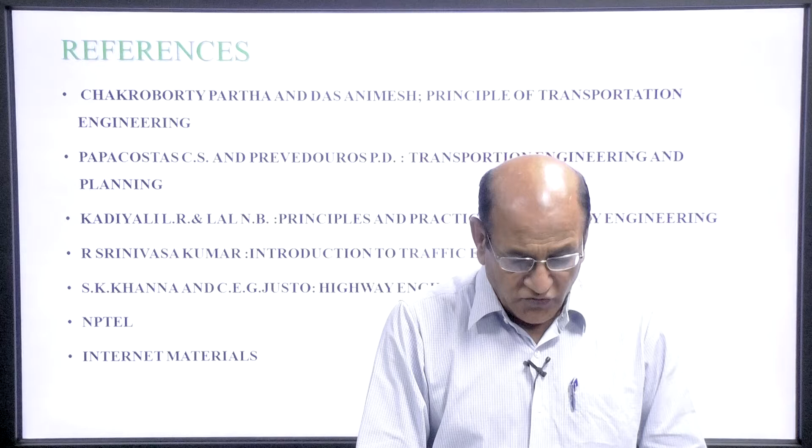References I have taken: Chakroborty Partha and Das Animesh, Principles of Transportation Engineering. Second, Papacostas, C.S. and Prevedouros, P.D., Transportation Engineering and Planning. Kadiyali, L.R. and Lal, N.B., Principles and Practices of Highway Engineering. R. Srinivasa Kumar, Introduction to Traffic Engineering. Some material has been taken from NPTEL and some material has been taken from the internet.

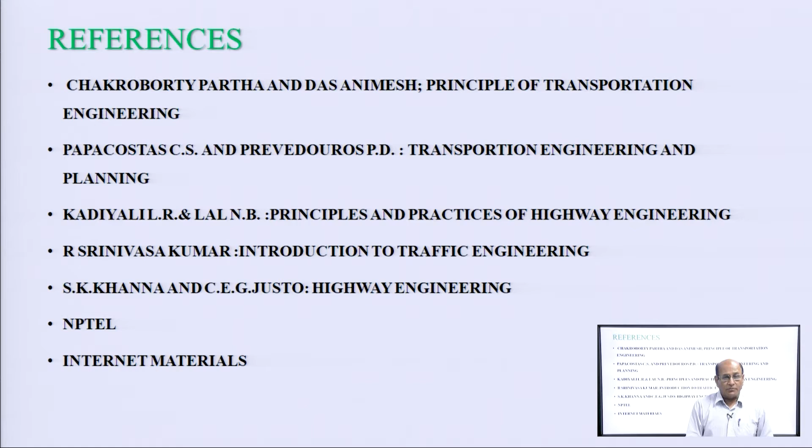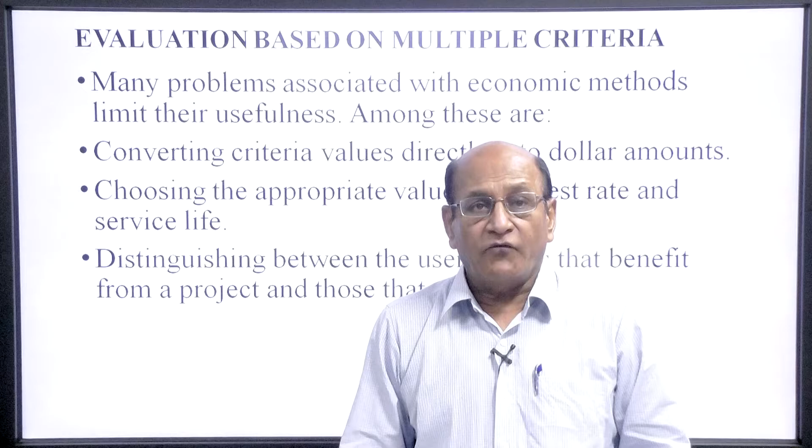First is evaluation based on multiple criteria. Many problems associated with economic methods limit their usefulness. Among these are converting criteria values directly into dollar amounts or rupee amounts. Second, choosing the appropriate value of interest rate and service life. The next is distinguishing between the user groups that benefit from a project and those that may lose.

Evaluation is the process by which we can determine which project or which alternatives are better than others. Finally, we can choose one of them, but there are many criteria for selection of the alternatives. Suppose we are talking about Lucknow; nowadays Kisan Path is under construction. There are many alternatives of Kisan Path. That includes construction cost, land cost, compensation of lands, comfort to the passengers or users, and of course, environmental impact. Presently, Kisan Path is on the outer periphery of Lucknow. It is covering some part of other districts also.

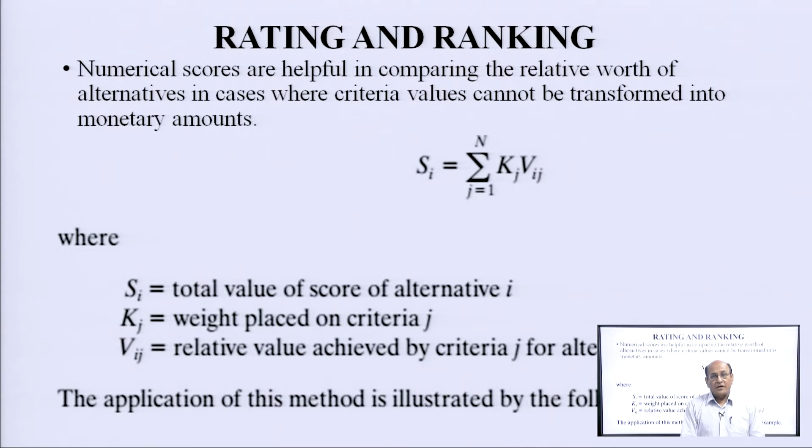This discusses evaluation methods that seek to include measurable criteria that are not translated just into monetary terms. The main thing in evaluation is rating and ranking of the alternatives or projects, because this is one of the tools by which we can say this project or this alternative is better than that one. So, numerical scores are helpful in comparing the relative worth of alternatives in cases where the criteria values cannot be transformed into monetary amounts.

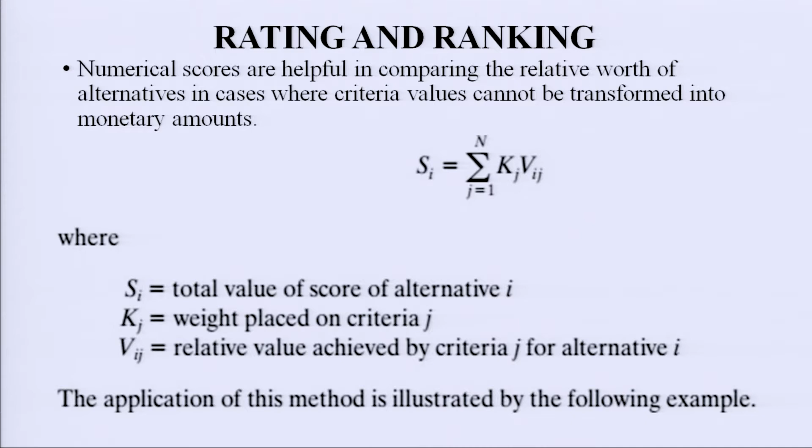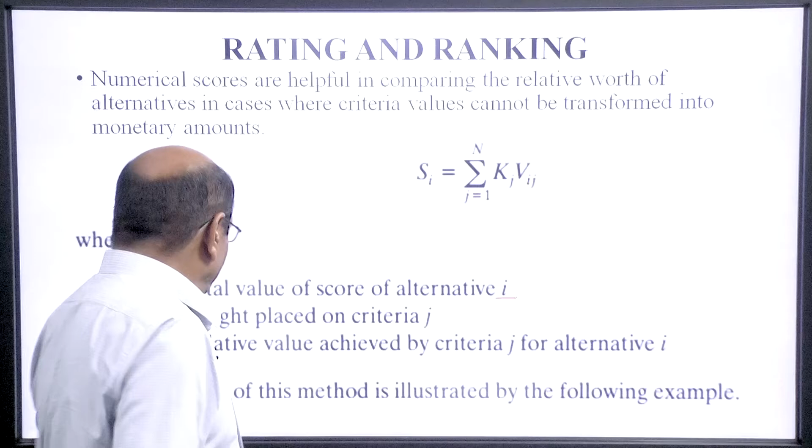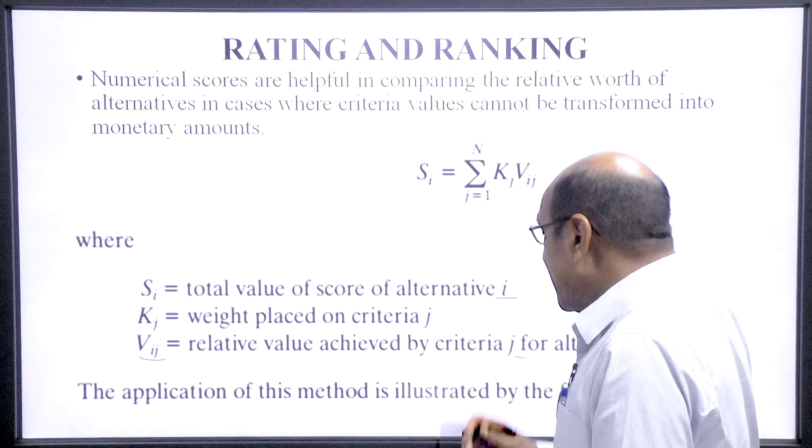So, this can be written as S_i = sum over j = 1 to n of k_j V_ij, in which S_i is the total value or score of alternative i, k_j is the weight placed on criterion j, and V_ij is the relative value achieved by criterion j for alternative i. The application of this method is illustrated by the following example.

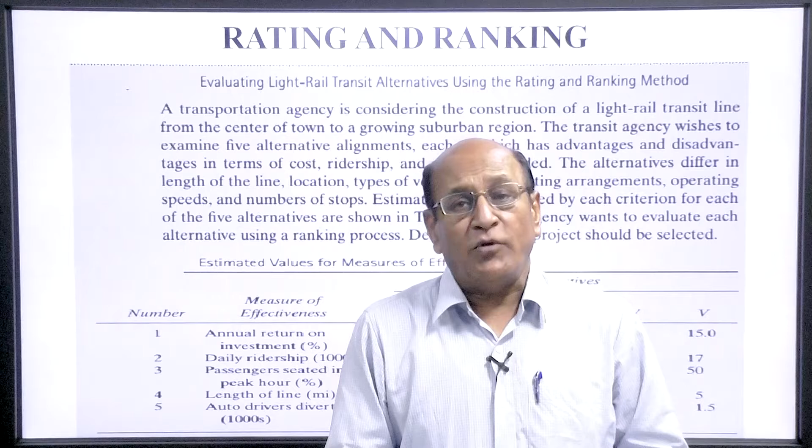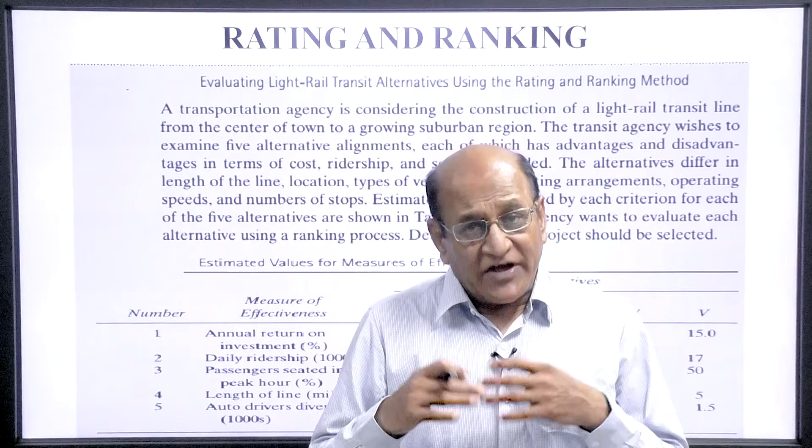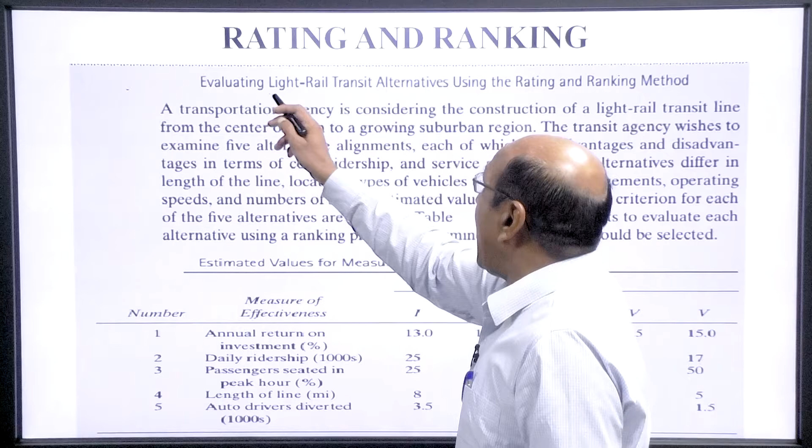This example has been taken from the internet, and the example is from the USA, for understanding point of view. So, we have taken evaluating light rail transit alternatives using the rating and ranking method. A transportation agency is considering the construction of a light rail transit line from the center of the town to a growing suburban area or region. The transit agency wishes to examine 5 alternative alignments, each of which has advantages and disadvantages.

In terms of cost, ridership and service provided. The alternatives differ in the length of line, location, type of vehicles used, seating arrangement, operating speed, number of stoppages. Estimated values achieved by each criterion for each of the 5 alternatives are shown in the table. This is the table. The agency wants to evaluate each alternative using a ranking process. Determine which project should be selected.

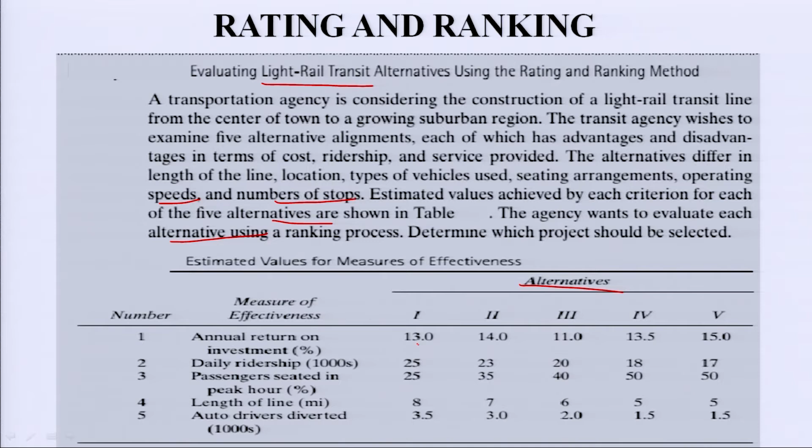The next is length of line in miles. In alternative 1 we can see here that is 8 miles, alternative 2 7, alternative 3 6, alternative 4 5 and alternative 5 5 miles. So, this is the table in which the advantages and disadvantages of alternatives are given.

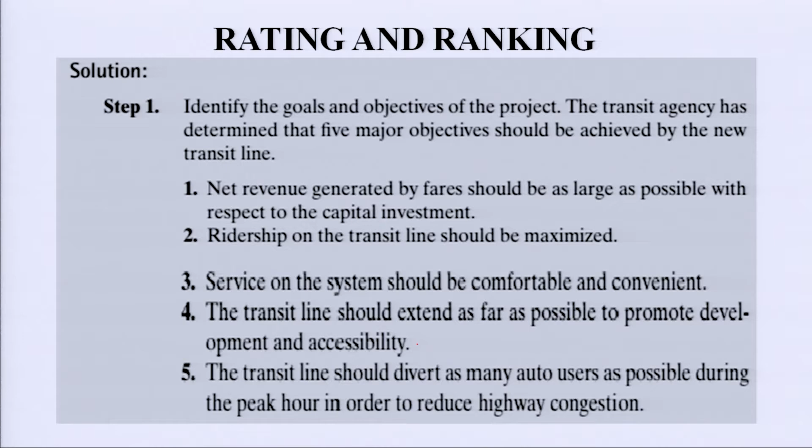So, now come to the solution. What would be the solution? The first step is identify the goal and objectives of the project. This is the top priority work. The transit agency has determined that 5 major objectives should be achieved by the new transit line.

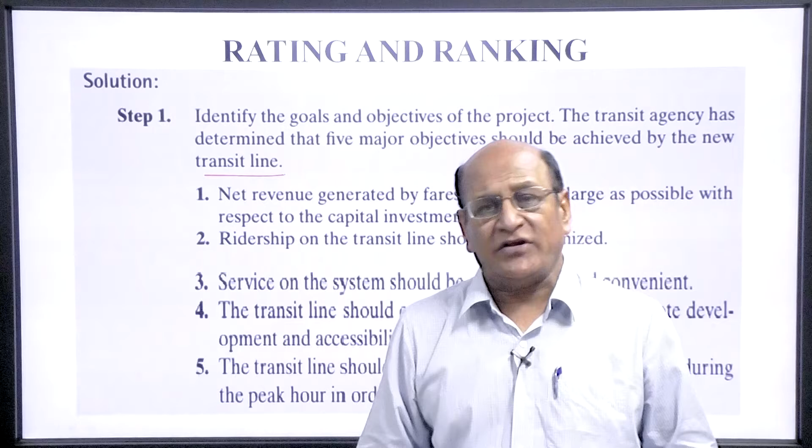And what are the objectives? Net revenue generated by fare should be as large as possible, and this is the objective of any transportation system. Whatever the revenue generated in an alternative, that should be maximum and larger. This is our main motive or objective of any transportation system.

Second, ridership on the transit line should be maximized. Ridership should be more. One example I am giving you, Lucknow Metro. Lucknow Metro is going in loss. Why? The ridership is not increasing as it was expected. So, the total project is going in loss.

The next is service on the system should be comfortable and convenient. Cost-wise, it is not measurable, but it is one of the things considered while selecting an alternative, because comfort and convenience is one of the main issues of the transportation user.

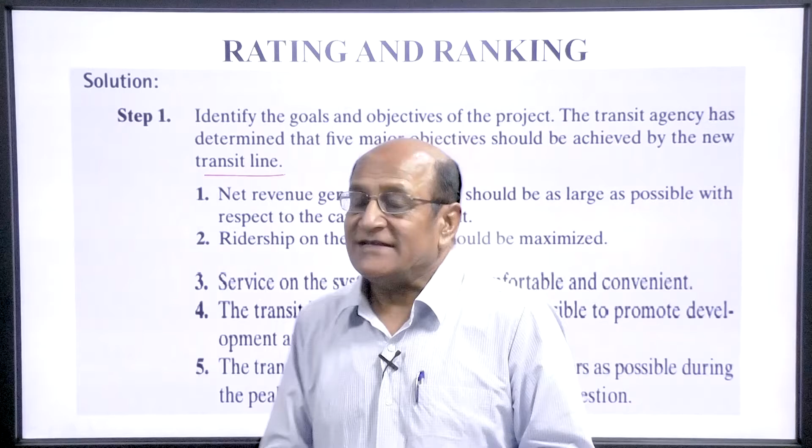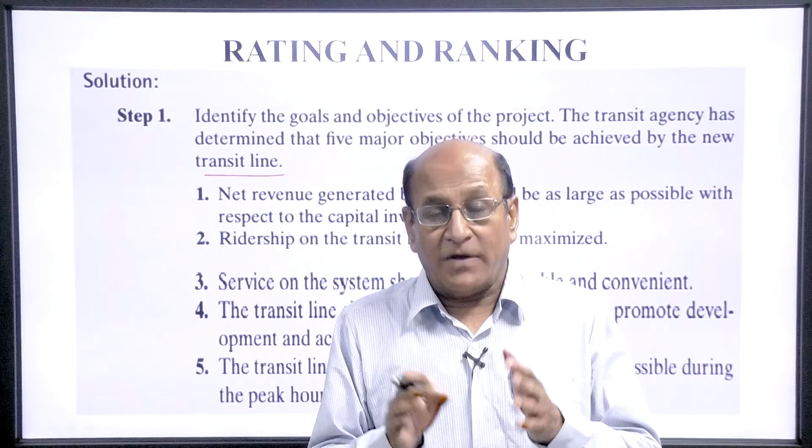The next is the transit line should be extended as far as possible to promote development and accessibility. The transit line should be such that it contributes to development of the city, urban area, but there should be accessibility also for that transit line.

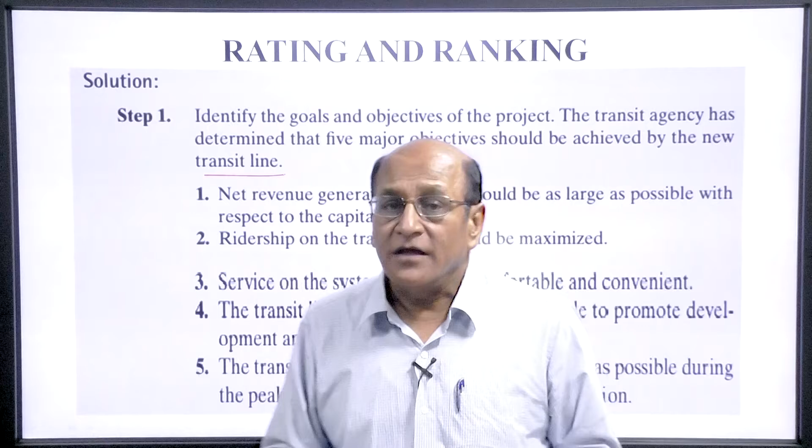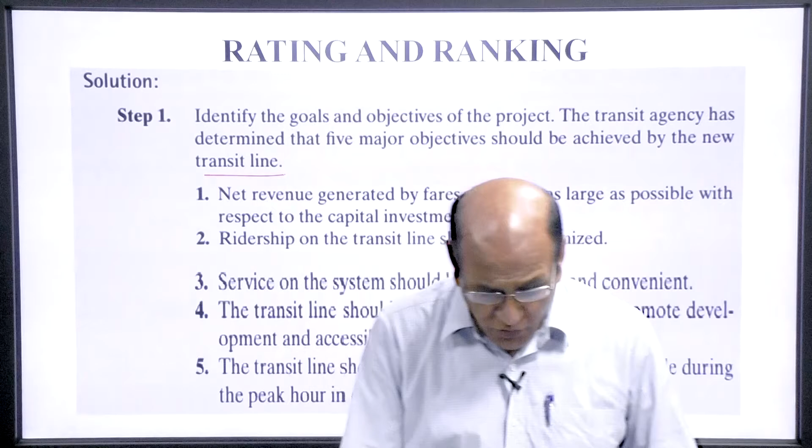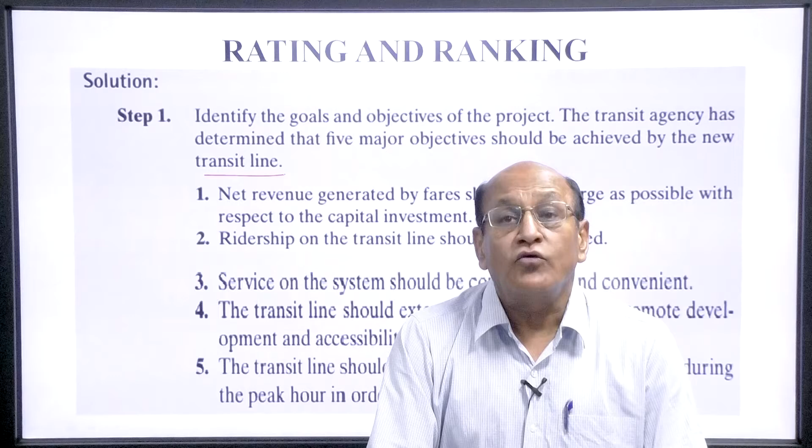The fifth objective is the transit line should divert as many auto users as possible during the peak hours in order to reduce highway congestion. So, the road user should be diverted during peak hour to reduce the congestion on the highway. So, these are the 5 objectives on which the alternatives are evaluated.

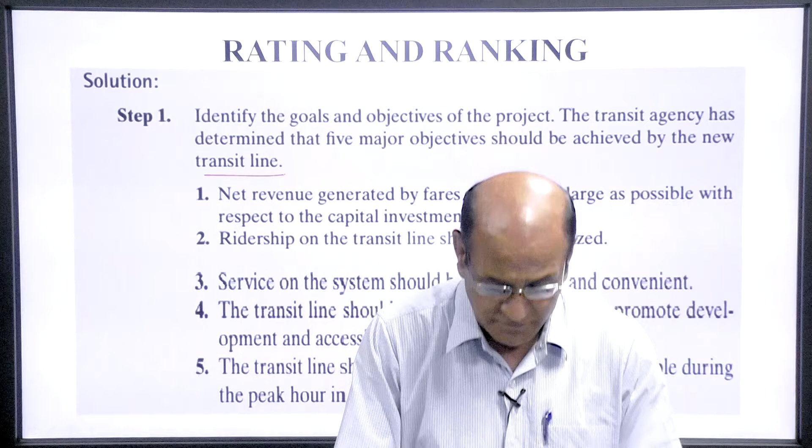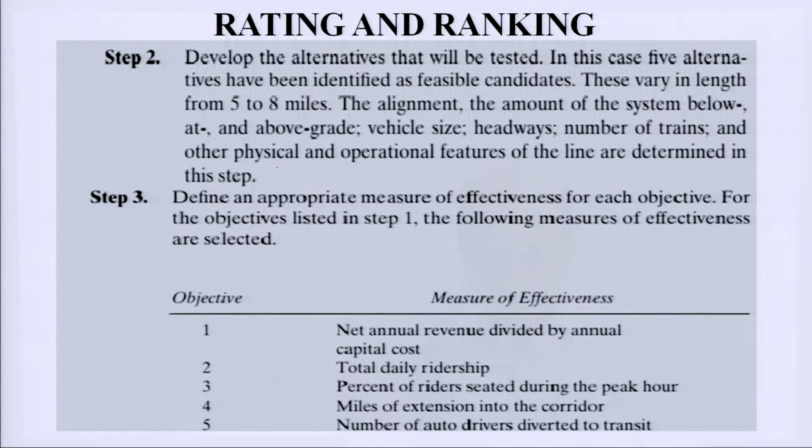Now, come to the second step, develop the alternatives that will be tested. In this case, 5 alternatives have been identified as feasible candidates. These vary in length from 5 to 8 miles; the alignment, the amount of the system below, at and above grade, vehicle size, headway, number of trains and other physical and operational features of the line are determined in this step. So, these physical things should be considered or determined in this step.

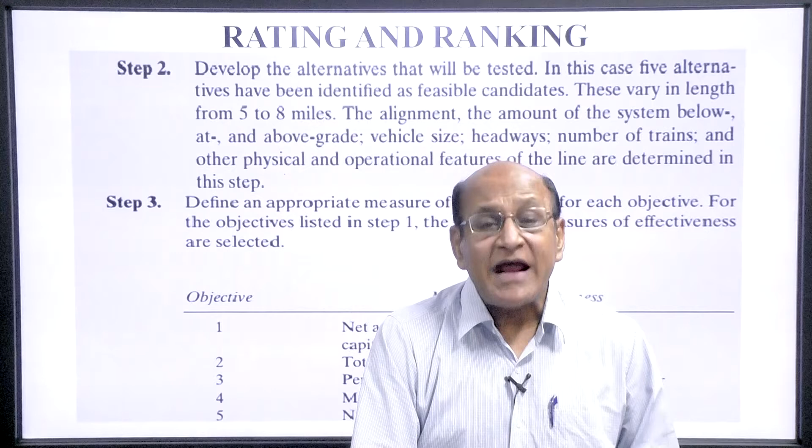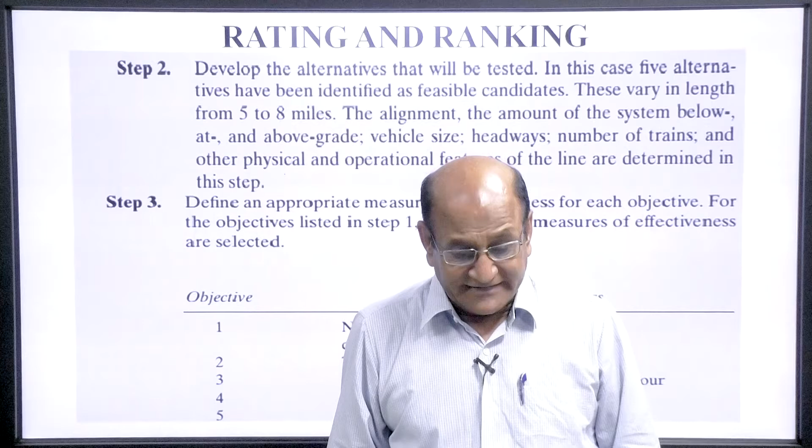Now, come to the third one, define the appropriate measure of effectiveness for each objective. We have 5 objectives and each objective should have an appropriate measure of effectiveness. For the objectives listed in step 1, the following measures of effectiveness are selected. In the table, objectives 1, 2, 3, 4, 5, and the measure of effectiveness here is net annual revenue divided by annual capital cost.

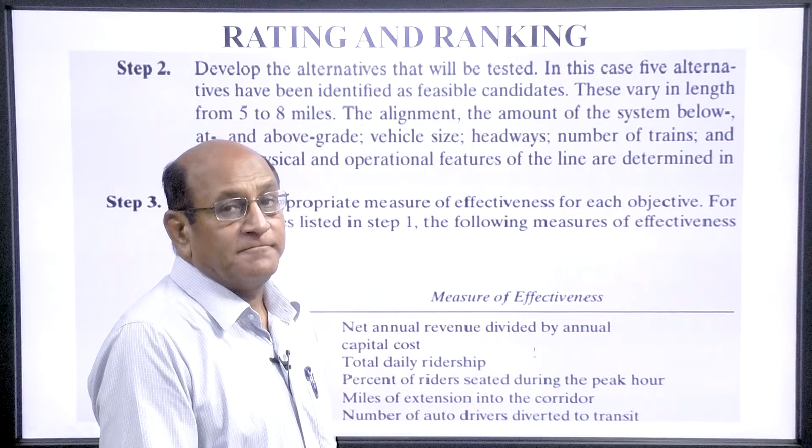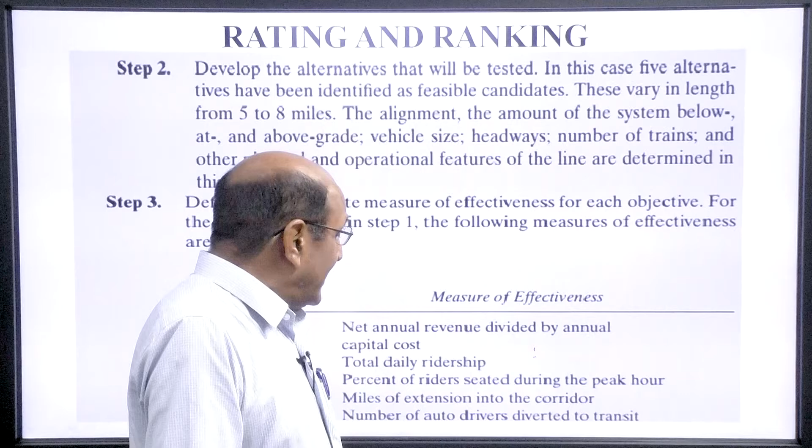Third, total daily ridership. The next is percent of riders seated during the peak hour. The next is miles of extension into the corridor. And the last, number of auto drivers diverted to transit during the congestion period or peak hour.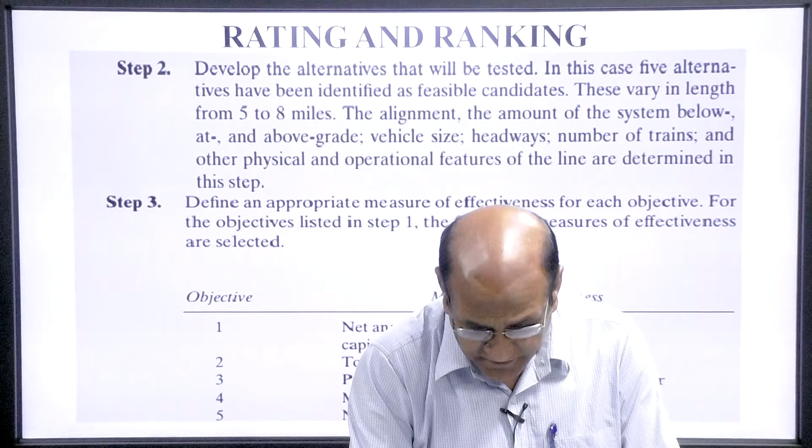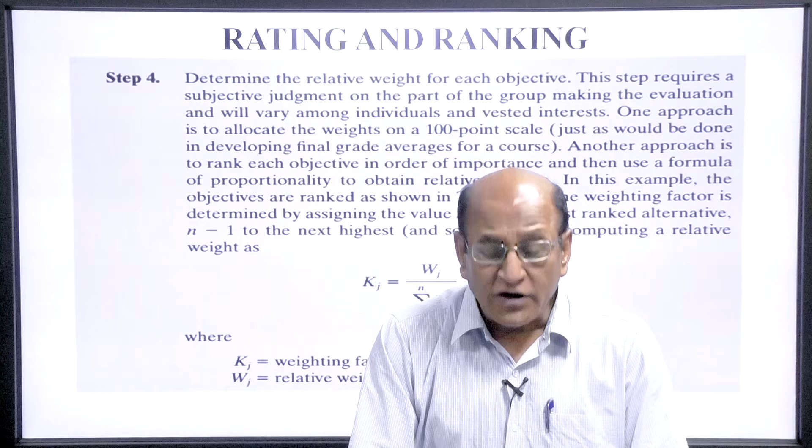The next step is step 4. Determine the relative weight for each objective. This step requires a subjective judgment on the part of the group making the evaluation and will vary among individuals and vested interests. One approach is to allocate the weight on a 100-point scale, just as would be done in developing the final grade average of a course.

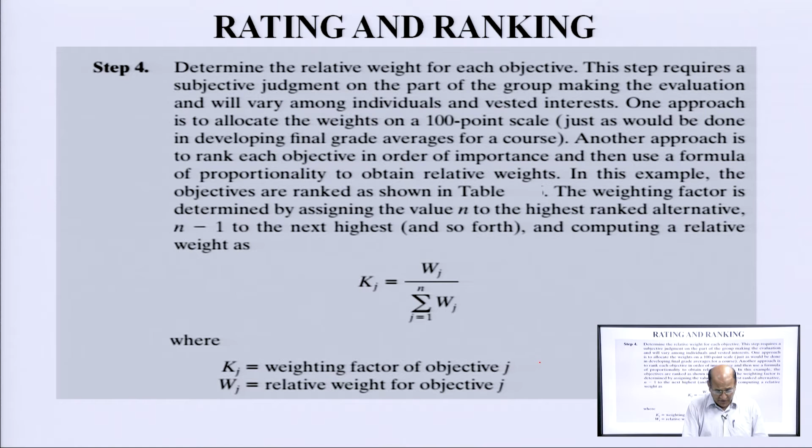Another approach is to rank each objective in order of importance and then use a formula of proportionality to obtain the relative weight. In this example, the objectives are ranked as shown in the table. The weighting factor is determined by assigning the value n to the highest ranked alternative, n minus 1 to the next highest, and so forth, and computing a relative weight.

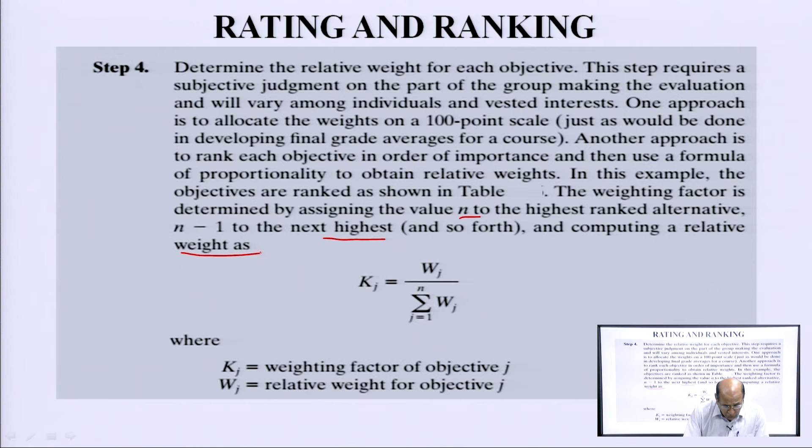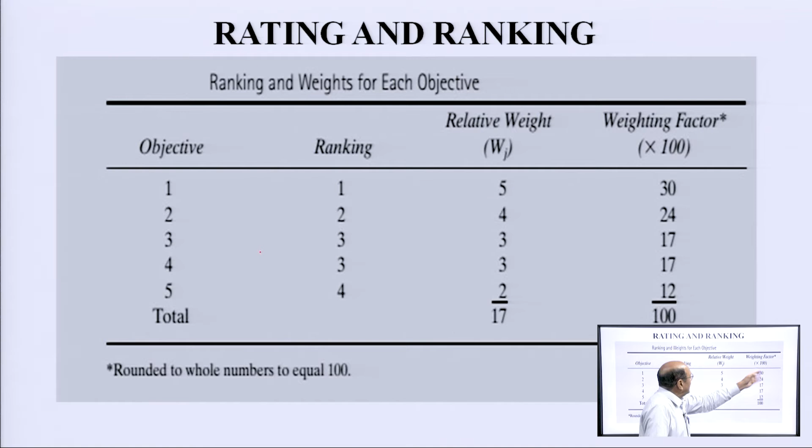By this formula, Kj is equal to Wj divided by the sum over j equal to 1 to n of Wj, where Kj is the weight factor of objective j and Wj is the relative weight of objective j. So, here are the objective ranking, relative weight and weighting factors. The ranking is 1, relative weight 5 and weighting factor is 30. So, these are the relative factors.

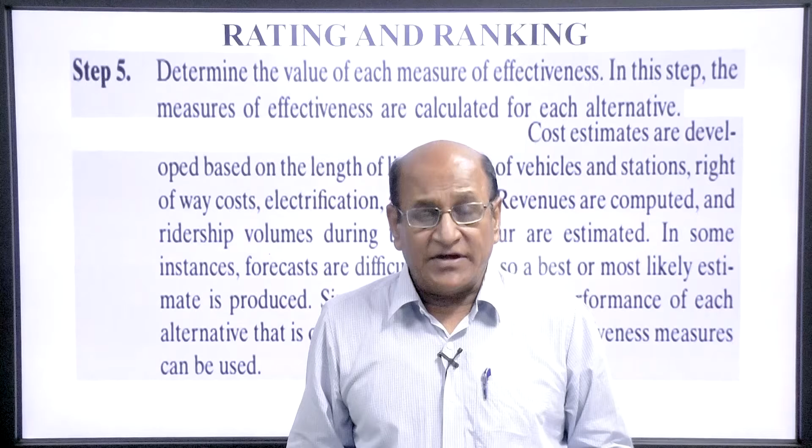Now come to step 5: determine the value of each measure of effectiveness. In this step, the measures of effectiveness are calculated for each alternative. Cost estimates are developed based on the length of the line, number of vehicles and stations, right of way cost, electrification, and so forth.

Revenue is computed and the ridership volume during the peak hour is estimated. In some instances, forecasts are difficult to make, so a best or most likely estimate is produced, since it is the comparative performance of each alternative that is of interest. Relative value of effectiveness measures can be used.

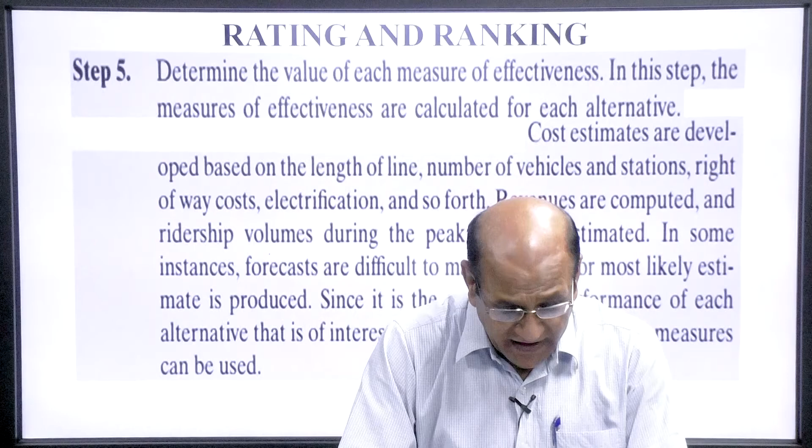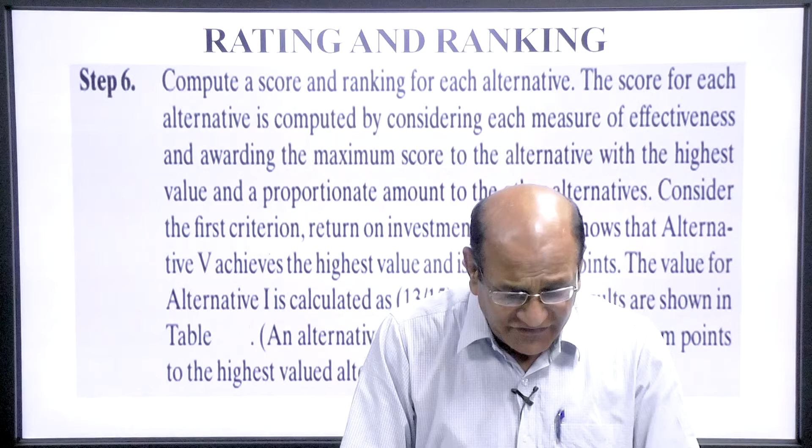Then come to step 6: compute a score and ranking of each alternative. This score for each alternative is computed by considering each measure of effectiveness and awarding the maximum score to the alternative with the highest value and a proportionate amount to other alternatives.

Consider the first criteria, return on investment. The table shows alternative fifth achieves the highest value and is awarded 30 points. The value for alternative first is calculated as 13 by 15 into 30, that is 26. The results are shown in the table.

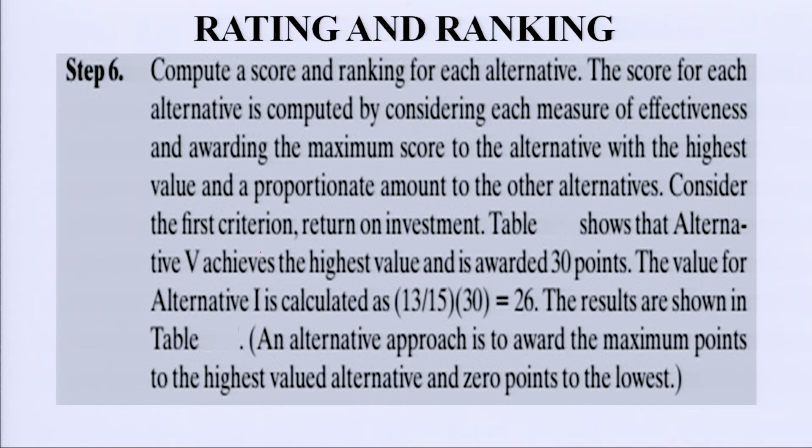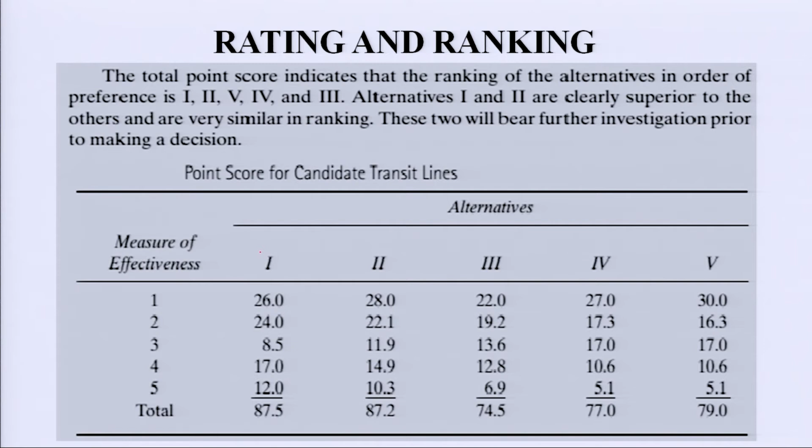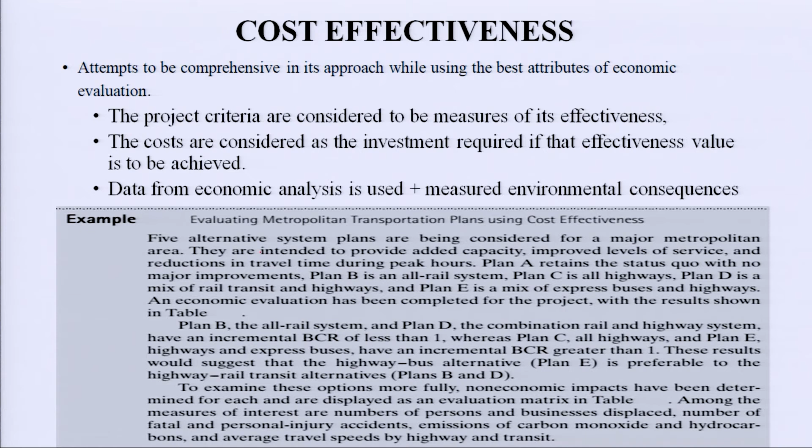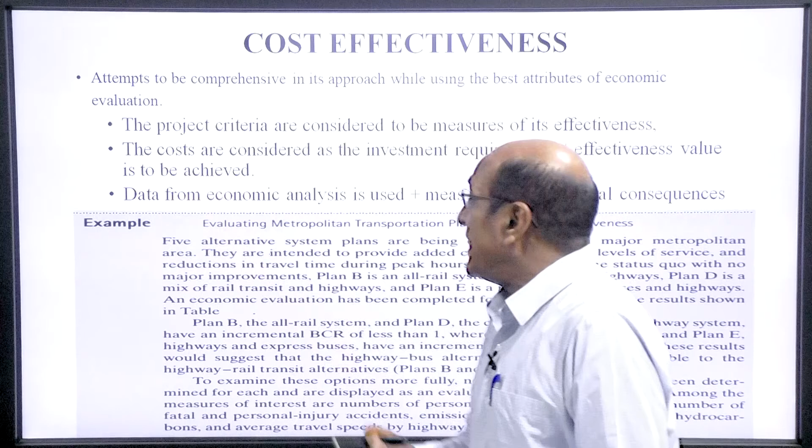Cost effectiveness attempts a comprehensive approach while using the best attributes of economic evaluation. The project criteria are considered to be the measure of effectiveness. The cost is considered as the investment required if the effectiveness value is to be achieved. The data from the economic analysis is used plus measured environmental consequences.

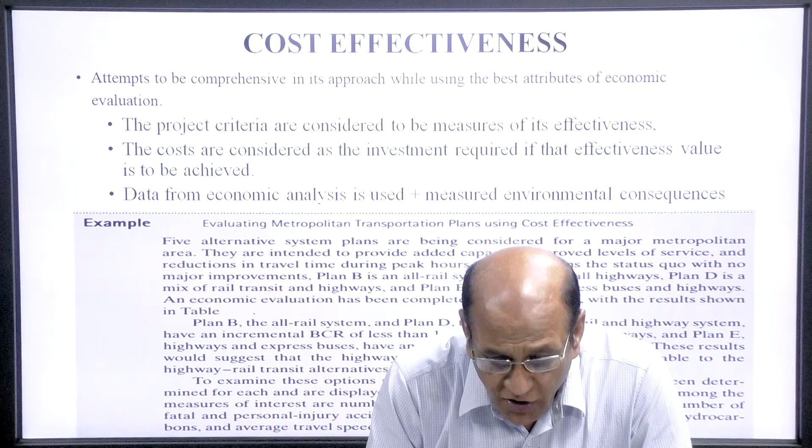This is an example of evaluating metropolitan transportation plans during cost using cost effectiveness. The solution is given here. The examination of the table yields several observations in terms of number of transit passengers carried. Plan E ranks highest, followed by plan B.

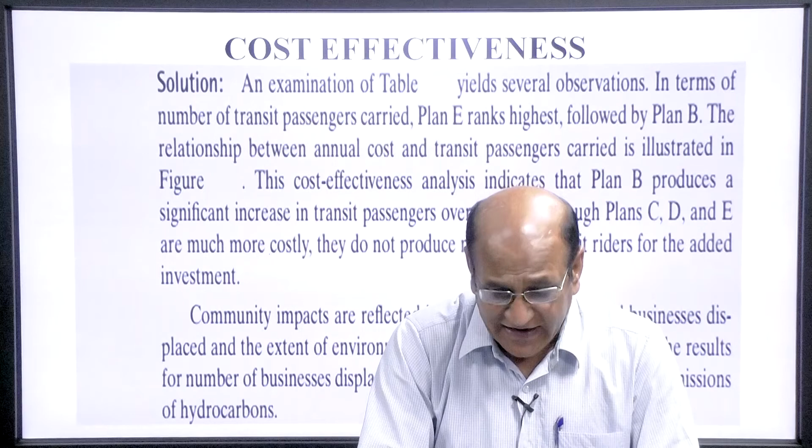The relationship between the annual cost and the transit passengers carried is illustrated in the figure. The cost effectiveness analysis indicates that plan B produces a significant increase in transit passengers over plan A, although plans C, D and E are much more costly. They do not produce any more transit riders for the added investment.

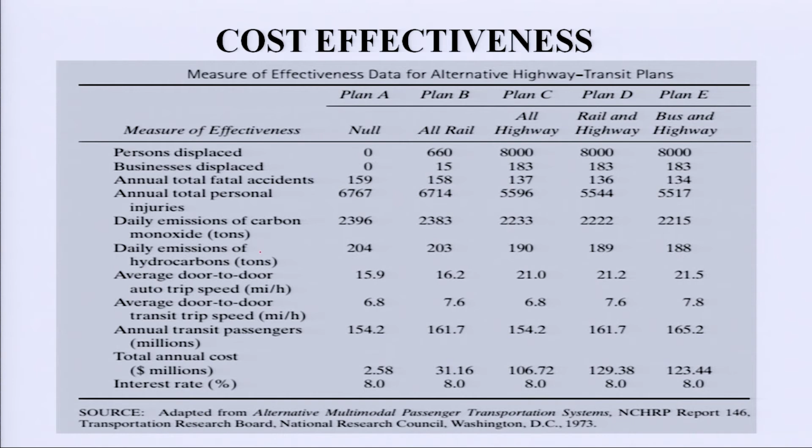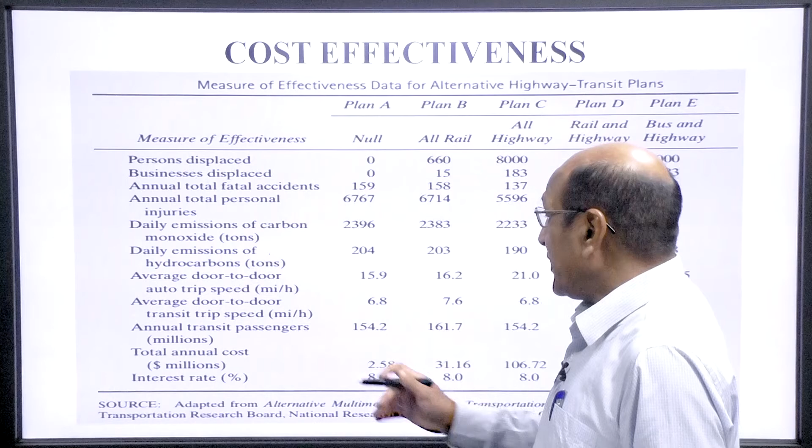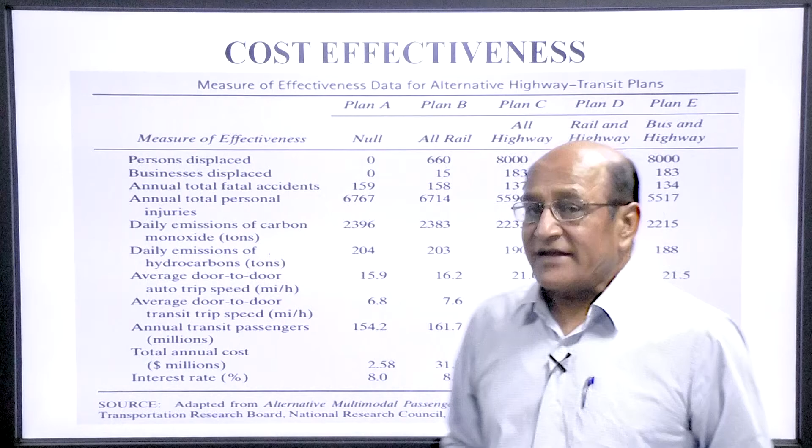So we can see here the cost effectiveness mentioned in the table, where it displays: annual total fatal accidents, annual total personal injuries, daily emission of carbon monoxide, daily emission of hydrocarbons, average door to door auto trip speed, average door to door transit trip speed, annual transit passengers in millions, total annual cost, and interest rate, all given in the table.

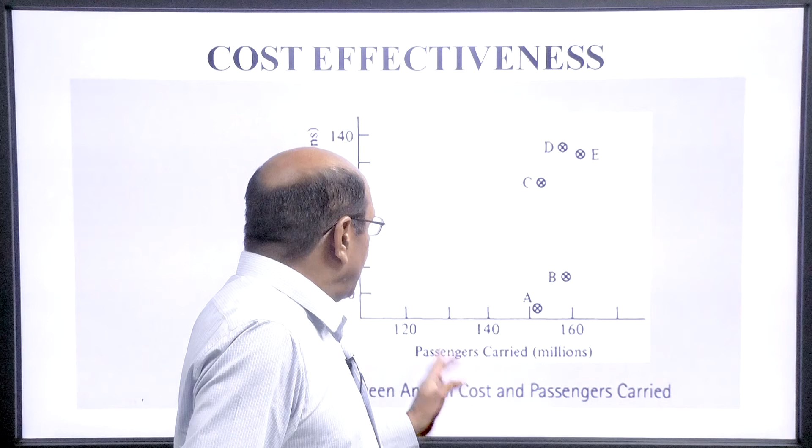This is the graph between the annual cost and the passengers carried in millions, and we can see here the cost is increasing; with just a few numbers increases, the cost increases in this way. Then this is the passengers in millions, and it is shown here.

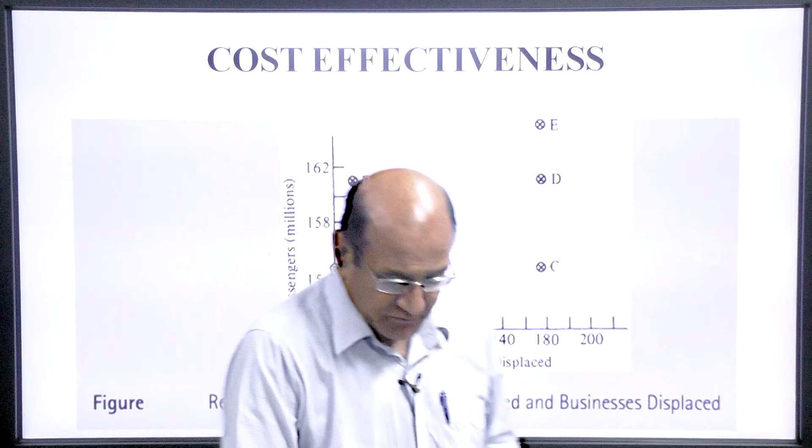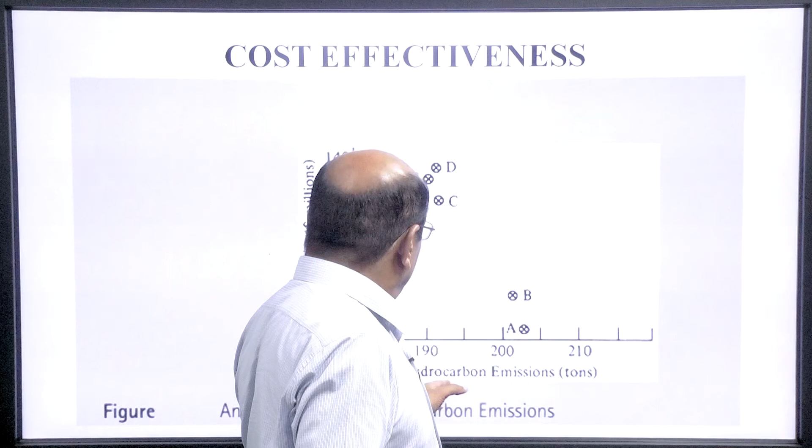The next is hydrocarbon emissions, with annual cost given here, and we can see the cost is much higher when the hydrocarbon emission is lower.

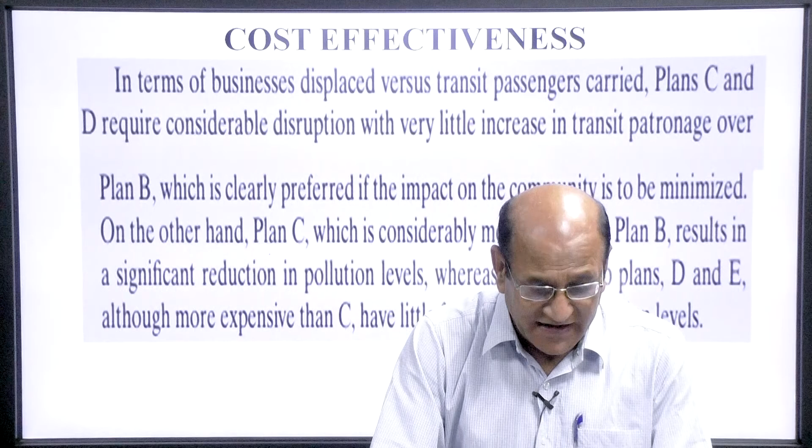So in terms of cost effectiveness, we can say that plans C and D require considerable disruption with very little increase in transit patronage over plan B.

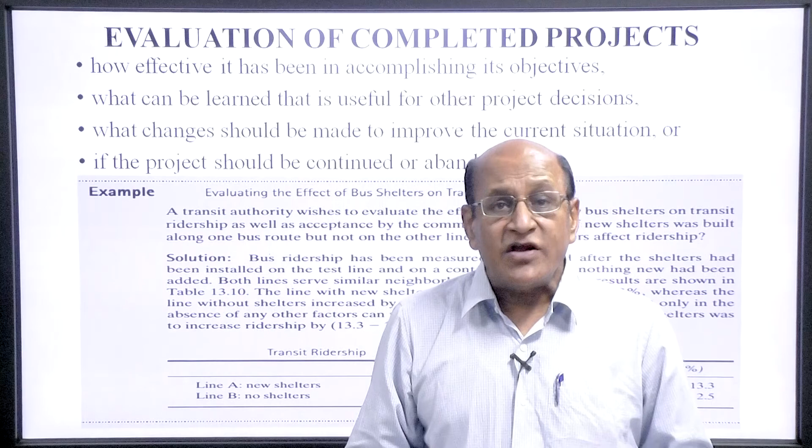So for evaluation, we can go for the evaluation of a completed project to compare the alternatives. We can see how effectively it has accomplished its objectives, or what can be learned that is useful for other project decisions, and what changes should be made to improve the current situation if the project should be continued or abandoned.

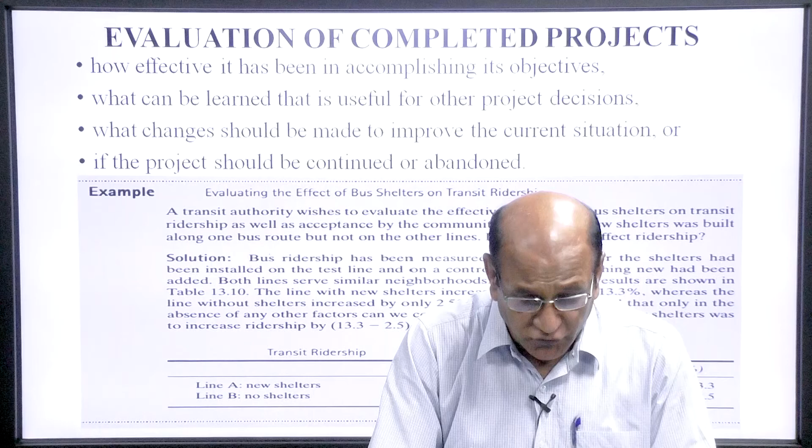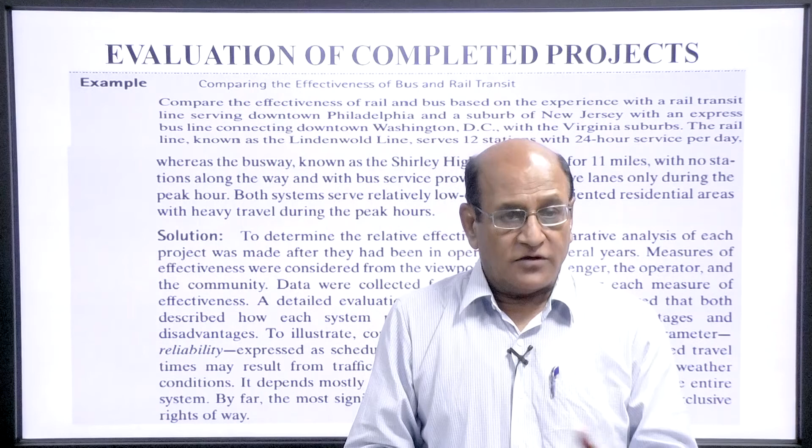So an example is given here. For evaluation, we can go for the evaluation of the completed project for comparing the alternatives we are considering. These are the examples given here.